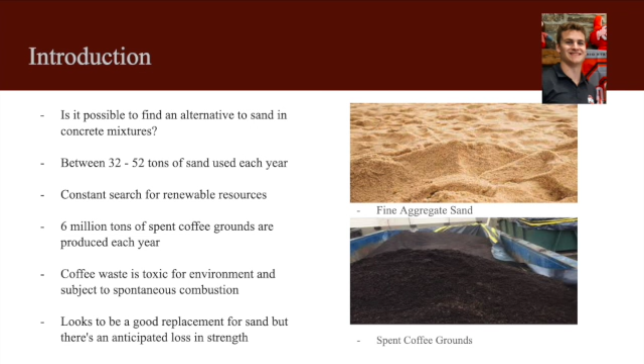Spent coffee grounds contain toxic chemicals that are eventually harmful to the environment while they decompose. In fact, a large quantity of coffee grounds disposed at the same time creates a chance of spontaneous combustion in the landfill that is full of flammable materials. With all these factors in mind, coffee seems like it has a chance of being a good substitute for sand in concrete production. However, with coffee being an organic material, we expect there to be some loss in strength in the concrete and a decrease in the workability as it will absorb some of the moisture.

In order to test this, we performed a slump test and compression test on 3 different sample mixtures. One of the samples, being the control sample, contained Portland cement, water, number 57 limestone and fine concrete sand. The other samples were similar, except the fine aggregate consists of different ratios of the fine sand aggregate and the spent coffee grounds. One sample contained 85% sand and 15% coffee grounds, and the other was an even 50-50 split of the two.

When choosing our material, we chose a fine concrete sand as it has the closest properties to spent coffee grounds. Using these tests and our created mixtures of concrete that contain coffee grounds, we want to see if there is enough strength and workability left in the mixtures to be used for the concrete slab in a driveway or parking lot that has a minimum strength of 4,000 psi. Next, we will go over more in depth the mix designs and how the materials are used.

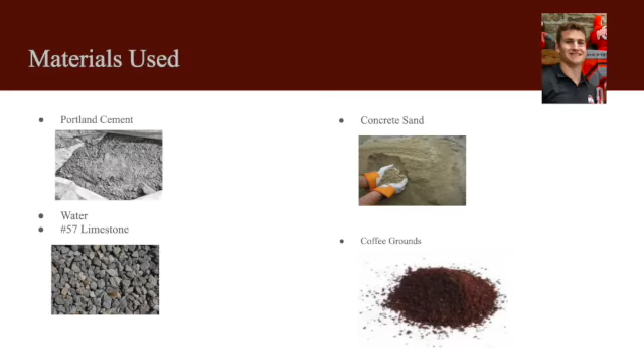Thank you, Brian. So, when we were looking at what type of concrete to make, we had to look at both the materials and our hypothesis that the coffee grounds are going to make the concrete weaker. So using this, we had to decide what type of concrete to make and for what purpose, and we chose parking lots and driveways. And this is because parking lots and driveways require a strength of about 4,000 psi after 28 days.

So with this type of strength in mind, our location, which we used Columbus, and the aggregate size that we were going to use in the concrete, we were able to find our batch weights. And our batch weights are basically the main thing that we can use to find our mix weights. In this case, it mainly helps with the control mix weight. So to be able to find the control mix weight, we had to find the total volume of everything the concrete was going to be put into, and this included 2 cylinders and slump cones that were going to be used to test after the material is mixed together.

So we were able to then find the control weight, which is shown here, by multiplying our batch weights by the volume in cubic yards. And it just gives us the poundage of each material that is needed. So then from the control mix weights, we were able to find the other design weights that we needed, which included an 85-15 and a 50-50 mix, which is by volume, between sand and coffee grounds. And because it was by volume, we had to find the weights to compare them to be able to find the other mix weights.

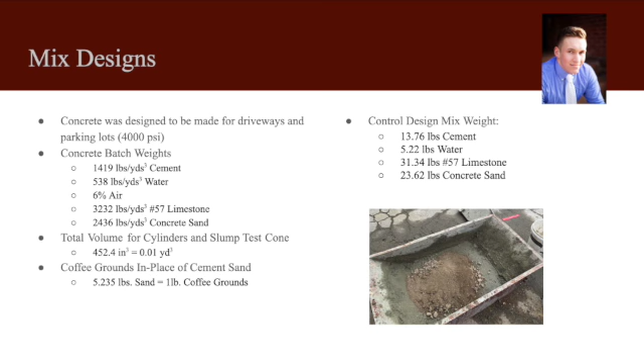So we found that for every 5.235 pounds of sand, there's 1 pound of coffee grounds that is needed. So then to find this 85-15 and 50-50 mix, we adjusted the weights of the concrete sand and then added in the coffee grounds. And these 2 different mixes should give the same amount of volume that we need. It allows us to get a consistent overall volumetric measure, so then we could perform our tests. And yeah, so we put all the materials into the bin that we had and mixed them together to make the concrete.

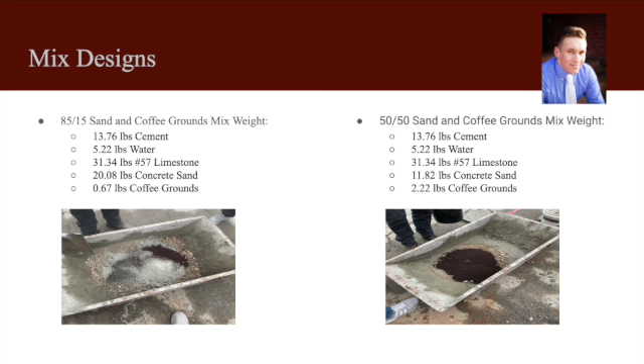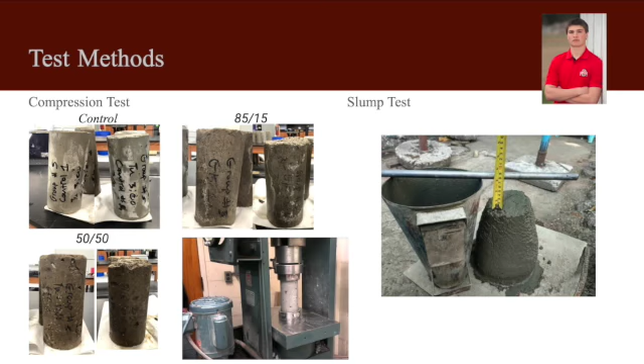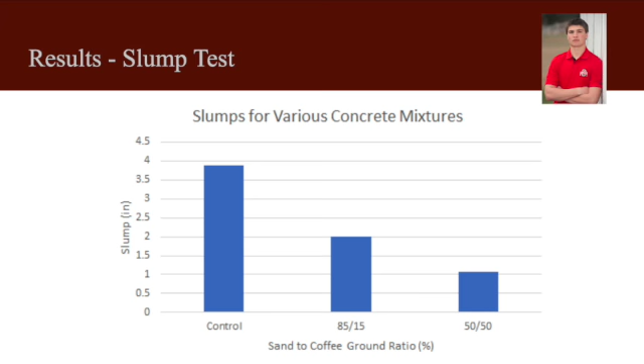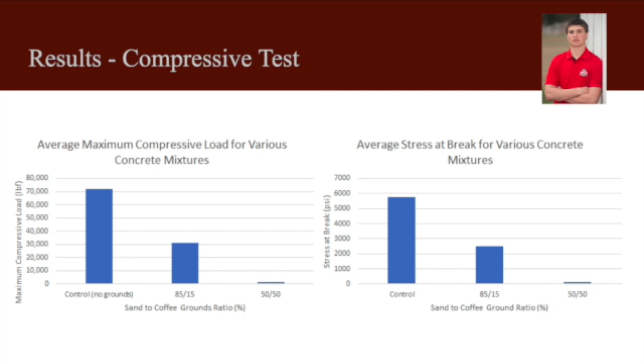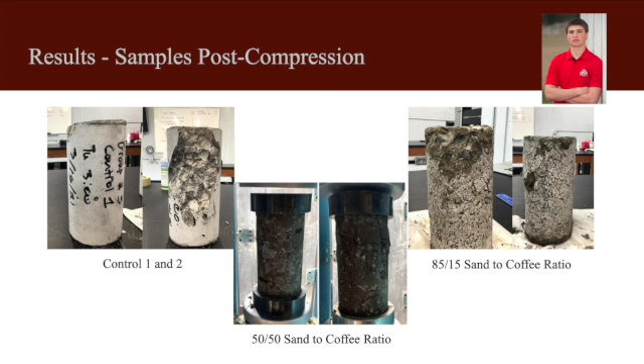In summary of the results, the coffee grounds negatively affected every single statistic that was measured for the purpose of our experiment. We found that as you increase the amount of coffee grounds used in replacement of fine aggregate sand, the workability and strength of the concrete will both decrease. So in other words, as you use more coffee grounds, the weaker and more brittle the concrete will become. The concrete will also become more viscous and harder to work with, so it won't flow as well when laying the concrete.

We found that replacing 15% and 50% of our fine aggregate sand with coffee grounds is not realistic for parking lot concrete. This is because both mixes that use the 15% and 50% coffee grounds did not meet the minimum strength requirements for concrete used in parking lots or driveways, which is 4,000 psi. Actually, both of these mixes failed before they even came close to reaching 4,000 psi.

However, this does not mean that there are not viable applications for use of coffee grounds in concrete. If we had more time and resources, we would have tested lower percentages of coffee grounds in the concrete to see how that affects the strength, particularly in the 5 to 10% range, because there is research out there that shows that the optimum amount of coffee grounds to use is between 5 and 10%. This is because this uses the most amount of coffee while mitigating the amount of strength loss.

Also, coffee grounds could be used for lower strength concretes. There's research out there that uses coffee grounds and other waste materials in concrete for non-structural embankment fills. There have also been experiments done which use coffee grounds in concrete and then use other admixtures such as slag to mitigate the strength loss from the coffee grounds. This is a good combination because you can replace more fine aggregate sand with the coffee grounds while not sacrificing too much strength.